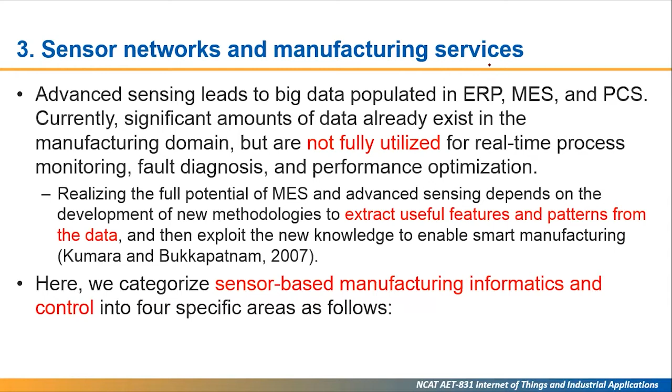First, data representation and visualization. Sensing systems communicate data in real time with databases. In many cases, energy budget and bandwidth pose significant challenges on the efficiency and effectiveness of data transmission. As such, a compact representation of data is necessary. A compact representation gets rid of the need to store large amounts of raw data.

For instance, store significant Fourier or wavelet coefficients for compression and transmission purposes. This compact representation also makes the underlying pattern more prominent in the transformed domain, so that the extraction of salient features becomes much easier in the context of smart manufacturing.

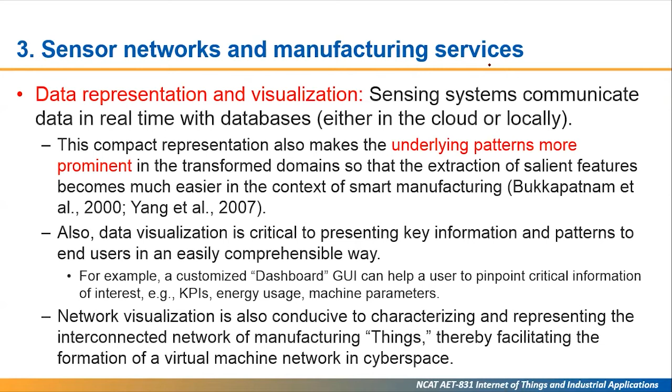Also, data visualization is critical to presenting key information and patterns to end users in an easily comprehensible way. Network visualization is also conducive to characterizing and representing the interconnected network of manufacturing Things, thereby facilitating the formation of a virtual machine network in cyberspace.

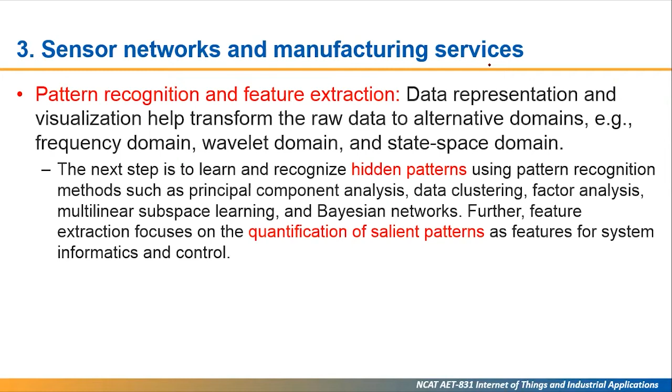Pattern recognition and feature extraction. Data representation and visualization help transform the raw data into alternative domains, for example, frequency domain, wavelet domain, and state space domain. The next step is to learn and recognize hidden patterns using pattern recognition methods such as principal component analysis, data clustering, factor analysis, multilinear subspace learning, and Bayesian networks. Further, feature extraction focuses on the quantification of salient patterns as features for systems informatics and control.

Sensor data fusion. It is common that multiple sensors with different sensitivity to certain operational characteristics are installed in a manufacturing system to collect homogeneous or heterogeneous signals. It may be noted that these multi-sensor signals can be interrelated if they are monitoring system dynamics from different perspectives. Multi-sensor data fusion consists of three critical steps. First, identifying multi-scale information flows among multiple sensors.

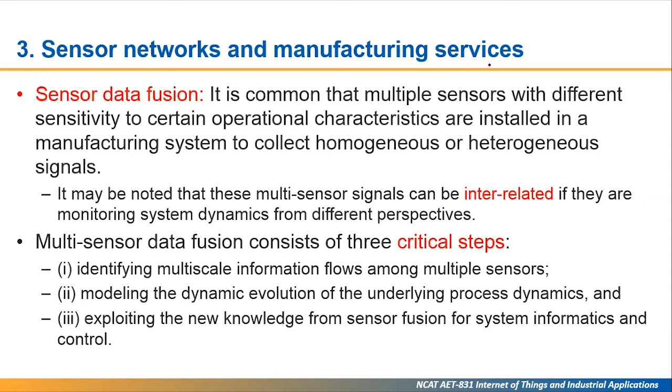Second, modeling the dynamic evolution of the underlying process dynamics, and exploiting the new knowledge from sensor fusion for system informatics and control. Conventionally, linear correlation structures between multiple sensors are characterized to monitor and control manufacturing processes. Effective multi-sensor fusion strategies should consider both information transfer flows in real-time sensor signals and the evolution of nonlinear dynamics in the underlying process.

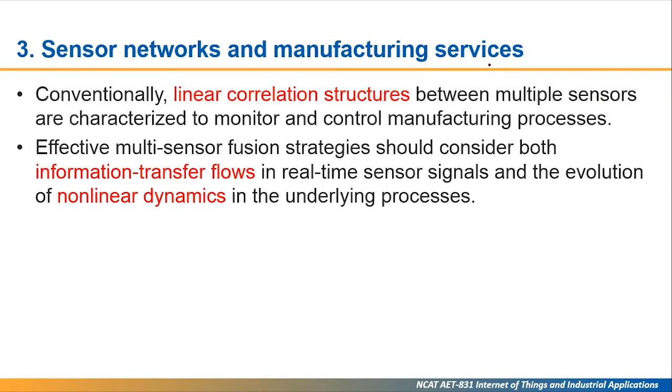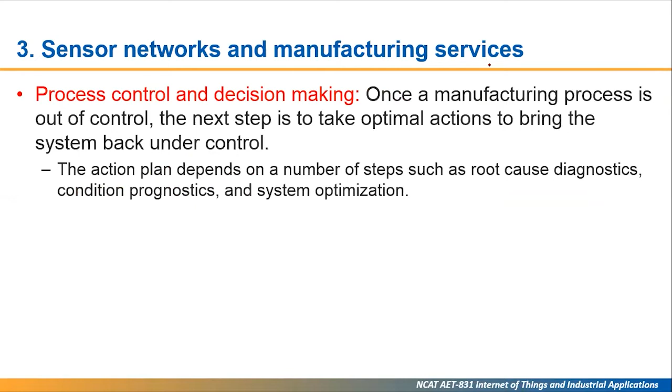Process control and decision making. Once a manufacturing process is out of control, the next step is to take optimal action to bring the system back under control. The action plan depends on a number of steps such as root cause diagnostics, condition prognostics, and system optimization. Traditional methods for root cause diagnostics include engineering-driven statistical models, failure mode and effect analysis. Also, physics-driven models can be formulated based on specific failure mechanisms in the manufacturing system.

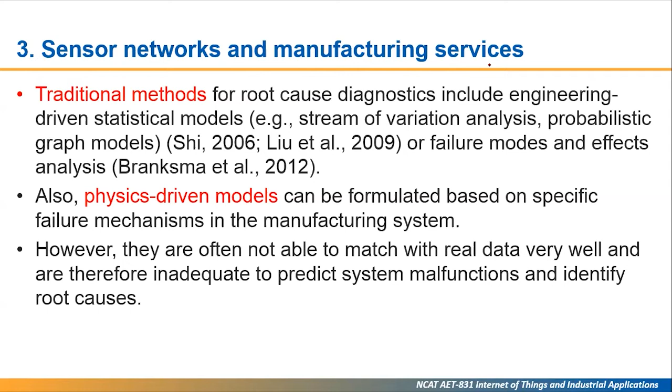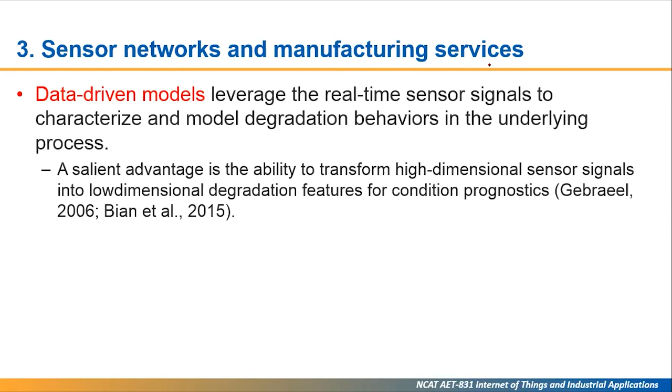However, they are often not able to match the real data very well and are therefore inadequate to predict system malfunctions and identify root causes. Data-driven models leverage the real-time sensor signals to characterize and model degradation behaviors in the underlying process. A salient advantage is the ability to transform high-dimensional sensor signals into low-dimensional degradation features for condition prognostics. Furthermore, simulation modeling replicates a real-world manufacturing system and better explains the underlying mechanism of the system.

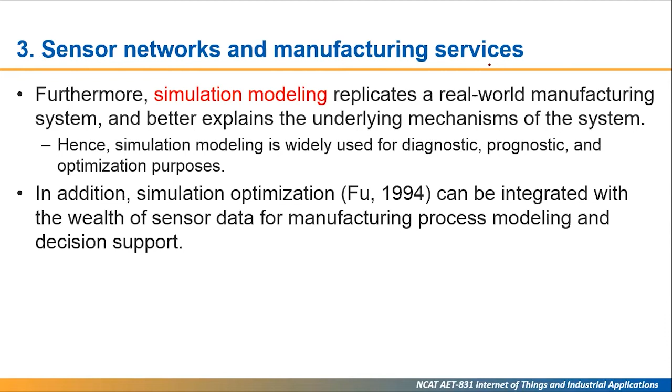Hence, simulation modeling is widely used for diagnostics, prognostics, and optimization purposes. In addition, simulation optimization can be integrated with the wealth of sensor data for manufacturing process modeling and decision support.

Internet-based data flow and cloud databases in the IoT context effectively facilitate mutual interaction between humans and machines. Cloud computing and analytics can help resolve complex decision-making problems in manufacturing. Cyber-physical manufacturing systems. The term cyber-physical manufacturing is also used in the literature to show the interrelated technologies of IoT, manufacturing, and cyber-physical systems. Cyber-physical systems integrate sensing, computation, control, and networking into physical objects and infrastructure, connecting them to the internet and to each other. We listed 2 examples here, and here we have more examples.

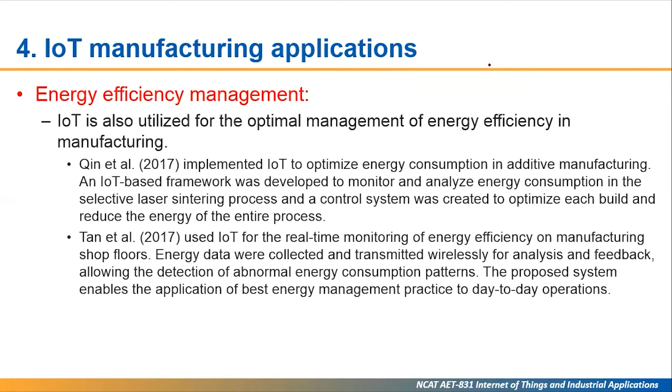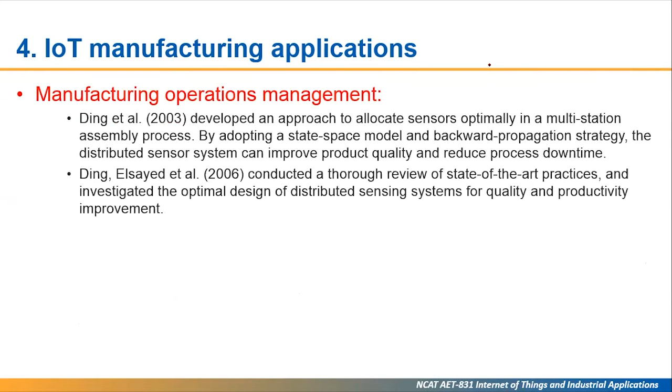Energy efficiency management. IoT is also utilized for the optimal management of energy efficiency in manufacturing. We listed 2 examples here and 2 more here. Manufacturing operations management. We listed 5 examples here. Another category of IoT application is safety and ergonomics. There is so much research that focuses on the design of IoT systems for safety and ergonomics in the manufacturing industry. Ergonomics, in other words, we can call it human factors. Basically, it studies how human beings can perform better in the working environment.

For example, when you try to open a door, how do we determine the height of the door handle, right? And also, how do we determine the height of your seat if it is adjustable? Those are the topics of early studies in human factors or ergonomics. But if people are to operate complex systems, definitely there will be more topics that need to be studied so that people and the technology can interact in a safer and more effective way.

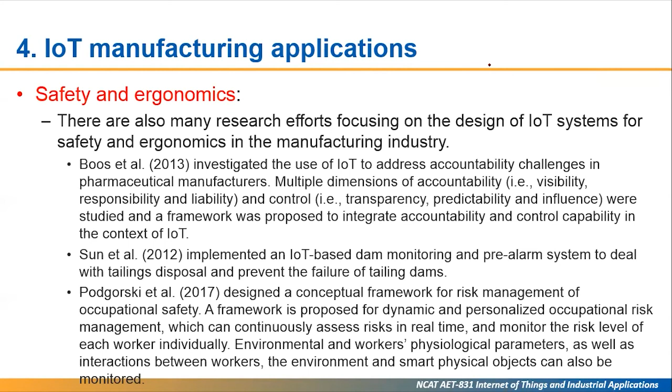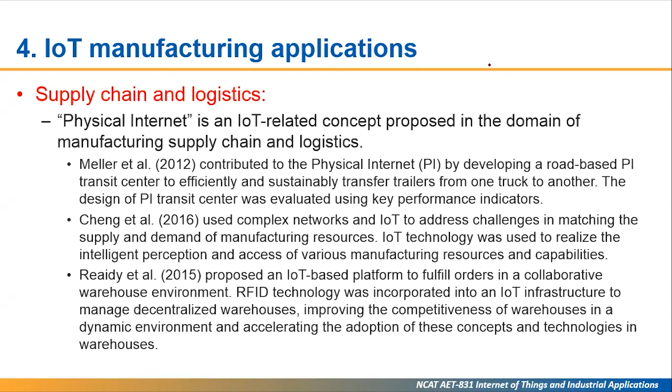Supply chain and logistics. Physical internet is an IoT-related concept proposed in the domain of manufacturing, supply chain, and logistics. So here are some representative studies in this direction. In addition to the academic research, industrial organizations have increasingly invested in new IoT technologies for process monitoring, operation optimization, fault detection, and optimal control.